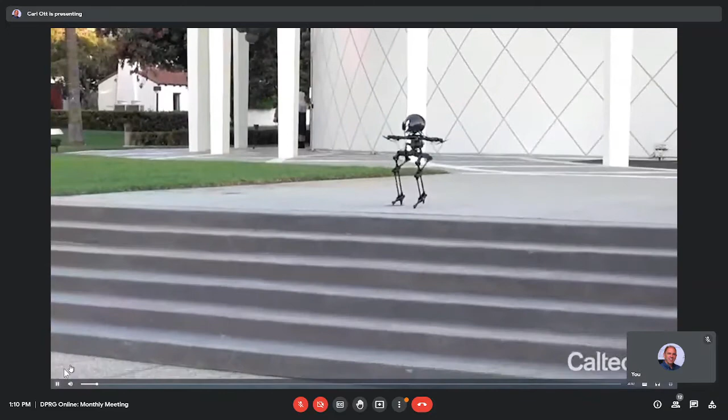So I thought, just for grins, I sent this out. I noticed it at lunch, but just for kicks, here's some kind of crazy idea, right? A walking robot that flies. So okay, let's mix up the platforms there. The sky is the limit.

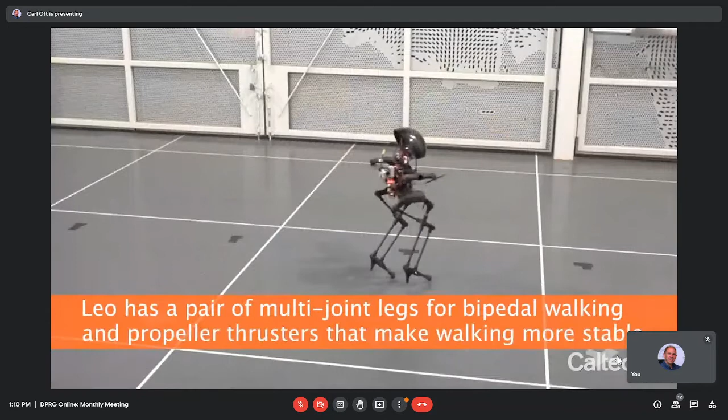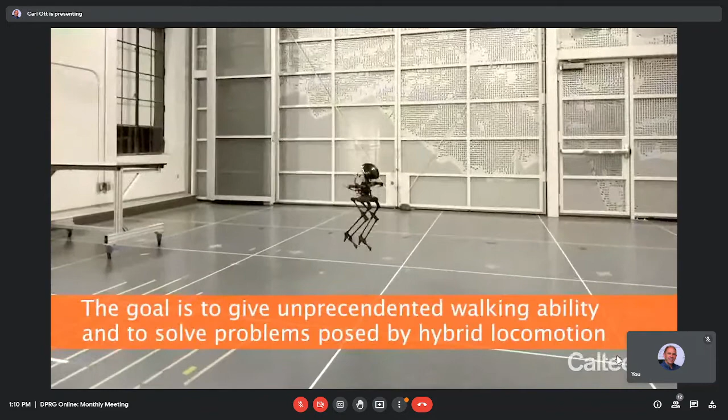Carl, I looked at that and read the article. It's more than just flies. Those rotors have to be turning for it to walk. That's how it balances. And if you look, the legs are very simple. Oh, and yeah, it also appears to have on high heel shoes. Yes, I noticed that. Obviously, a woman robot. So why would it have legs at all in that case, I'm thinking?

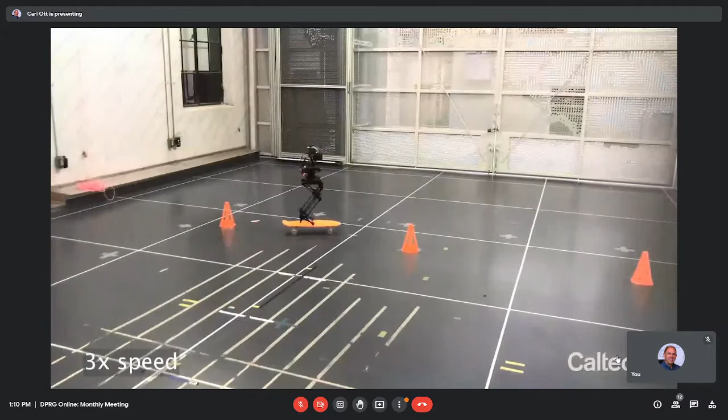Well, one might ask that question, John. There you go. I mean, other than touch, I could see it for feeling the surface maybe, but... It kind of moves like a marionette, doesn't it? Did it have it on the tightrope? It can walk a tightrope.

Yeah, but one thought would be, I wonder if it looked like it was very lightweight made, though, and they're maybe trying to conserve power, and maybe by walking they can lower the power requirement because they don't have to lift the weight.

Right. Might also help with positioning, but then again, with video cameras, I noticed like my little Mavic drone does a very good job of holding position. That's sort of an interesting thing. If you could sort of use drone technology, but yet kind of restrict your motion, sort of interesting.

Well, they're not having to balance with the legs. That's the trick. Legs just push this flying thing along the ground, but the balance all comes from the propellers. So with a walking robot, the hard part is balance, and responding to being pushed and stuff like that. Well, here the four propellers are handling all that, not the legs.

And I would think you could—I'll have to play with my drone to see what would happen if I dangle some legs from it. Although I think it tends to have a land sequence, and it also gets upset about things. At least with using a stock DJI drone, I guess it might be difficult. There's a mode you can fly in that turns off the landing sensors and so forth.

Okay, well, this is actually two-step. Sure. What I've wanted to do for a long time, let's see, with this balancing robot, one thing it cannot do is get up by itself. And I've thought for years about different ways of doing that. And what I've actually settled on—if you guys can remember, I know you haven't seen this guy run in a long time—these are bumpers, those made from rubber hose.

And here's another one that protects it because it does fall over. And so the idea was, let me back up. Suppose that I had a bail, basically replace this handle here with something that went like that. And better yet, right here, and it would serve as a handle. And right here in the middle of it, it would have a little wheel.

And then that needs to be run by something like some sort of high torque drive, maybe a worm gear or something like that, and can pivot either way. And you only have to get the robot up to about 30 degrees before it can jerk up on its own. So also then, because I could do that, I might be able to do other things with it.

Like, for example, I could lean it back and just rock back onto that tail wheel in a position of rest. Or if I thought I was going to fall over, which you can sense because once you hit full speed, you can't—you see how to describe this.

It's sort of like if you're running downhill when you're a kid and you start building up speed, and after a while you find you can't slow down. Because what you have to do to slow down is move the center of gravity behind your legs, and the only way to do that is to move your legs forward. Once you're running full speed, you can't move your legs forward anymore. So as a child, you start slamming your feet hard into the ground, trying to burn off some of that momentum so you can get your center of gravity behind your base and slow down.

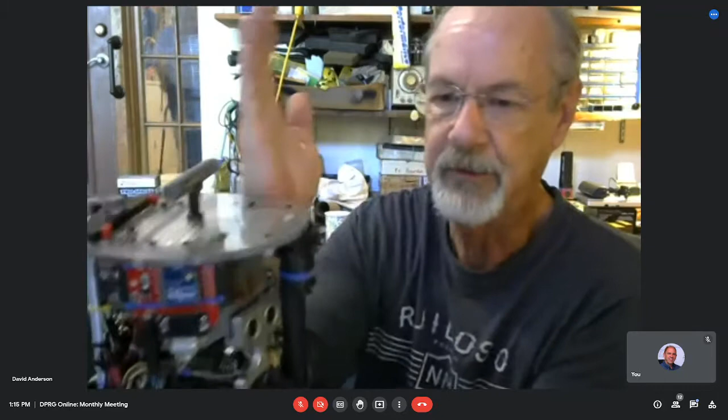So that's the same problem here. You can tell when he's going to fall over because he's leaning and running at full speed. At that point, maybe you could deploy this thing to at least catch yourself when you're falling. You might actually be able to use that in some way as part of the balance algorithm.

Yeah, so all of this started long ago when I was thinking about walking robots. The real problem when I built this robot was I spent all my time trying to get it to balance. I thought, okay, how do you get it to drive? Well, it turns out that if you make it balance, you've done everything you need to do. All you have to do is tilt it and it will drive. You can tilt it like a Segway by standing on it and shifting your body weight, or you can just shift where the up vectors are in software, and it has the same effect.

So I think it would be the same with a walking robot. That is, the gait—everybody concentrates on the gait. I bet the gait might arrive automatically if it was self-balancing.

And to prove that, I want you guys to do a search on robot passive walking. Do a Google search on robot passive walking. I'll do the same thing. Follow the articles. There should be some videos there, right?

There's one called Passive Walking Robot Propelled by Its Own Weight, from Ikinamo, 2011. Watch that video. Can't you just put it on the screen? Yeah, I got it coming. Here we go. Once we get past... oh, look at that.

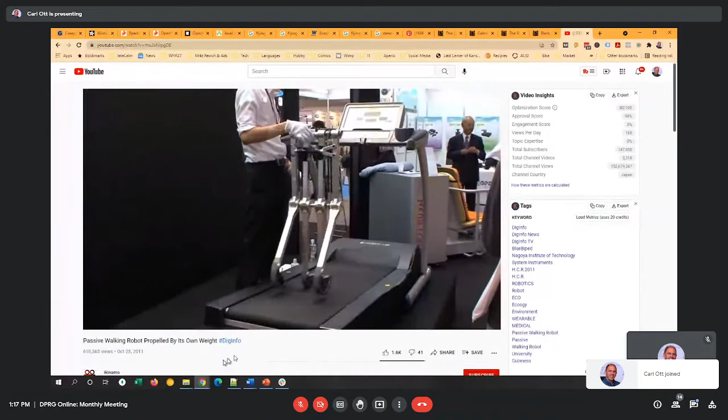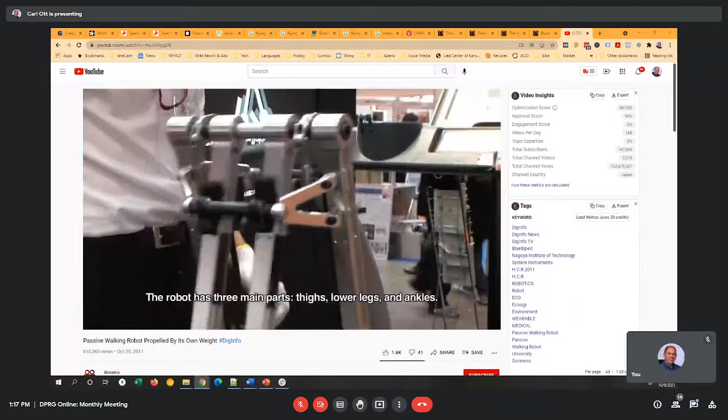Now, there's actually a guy about 20 years ago, whose name escapes me, who built the first one of these. His initial one could only walk downhill, but it walked on its own. There's no actuators, no motors, no batteries. The reason this is intriguing to me is because this is probably how we do it. One of the things that people who study bipedal walking robots observe is that all of our current robots use an enormous amount of energy to walk compared to what humans do, which is basically you just kind of fall forward, which is what this is doing.

So there's friction, which means it's taking energy for the motion, but I guess that's being provided by the conveyor belt in this case?

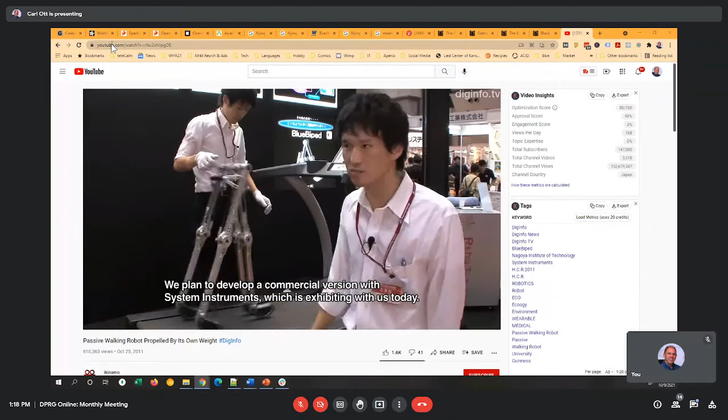There are some papers describing this pretty accurately, and the guy who built it built another one some years later, and the only sensor it had was a button for when the ball of the foot went down, and the only actuator was to push off when that foot is in the rear. And with those two functions, it could walk.

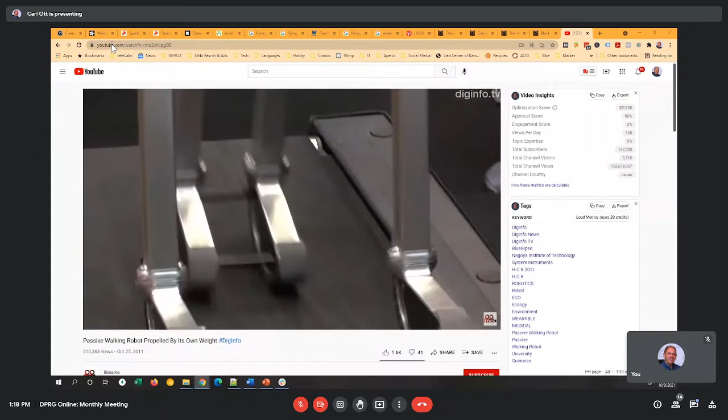Anyway, as I said, the people who study this suggest that this is actually the way we walk, and it's why we're able to do it at such low energy. You know, think about it—you eat one jelly donut, you can walk 10 miles.

It's sad, isn't it? All right, that's the end of my story. That's all I had to present.

That's pretty cool, so an upgrade, and at some point you might delve into walking robots. Well, the problem is I can't actually do the upgrade because that robot is stuffed full. There's no room for anything, I can't add any more weight to it, and it would have to be another robot. That's why I've actually never done it.

But I actually think it would be cool to have a robot whose main mode of locomotion was two-wheel, but could also drop down into a three-wheel or even four-wheel mode. Think about going off-road like a human does: as the slope gets steeper and steeper, after a while you go from two-legged to four-legged mode, leaning forward and using your arms. It seems like the robot could do the same thing on a really steep hill.

Cool. All right, all right.

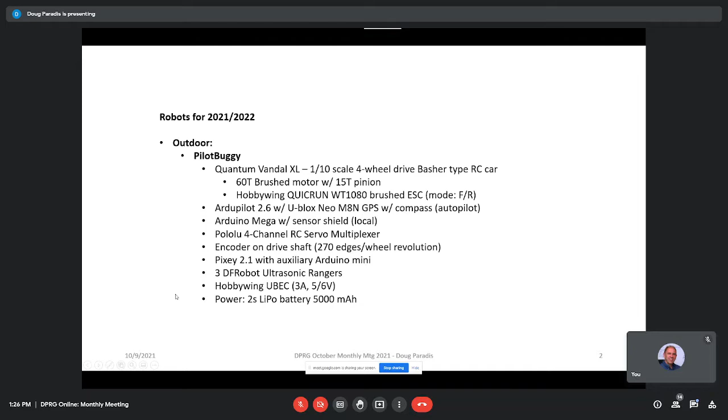This is what it looks like. So I'm going to go over here. One thing I did this year was I put on a set of NeoPixels, and this is my decoder ring, so I can tell when my safety... because when you're running behind the robot, reading a display is very hard to do, but seeing bright pixels, bright LEDs is pretty easy. The biggest problem with them is knowing which one is which, but with a little thought, you can figure out how that is.

So here's the 60 turn motor. Here's the ESC. Here's the Mega with a sensor shield on it, which breaks out so everything has a signal, ground, and VCC input for each lead. This is the NeoPixels. This is the Pixy, the bottom of it. You can't really see the camera.

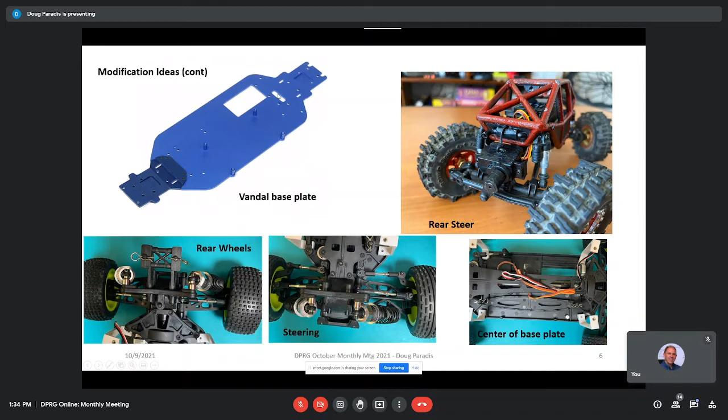So I think I've got a spare base coming to my home, and I think I can modify it so that I can basically make the back end of the robot look like the front of the robot. Now there's differences because right in this area I have my encoder, and right here is the main motor sprocket. So anyway, I'm gonna play with it.

Okay, so that's pretty much that one. And now on my indoor robot, I just call it Doug's test robot, because this is something I'm... a philosophy that I've gone to that I think has been really successful. I've got basically a standard custom laser cut chassis and 3D printed parts.

So I don't have to do that every time, I just take them and put them together. I've found a set of motors that works with this chassis that has encoders, and they're cheap, only $7.50 a piece. I'm using about the cheapest motor controller you can use. I am using an IMU, a BNO 055.

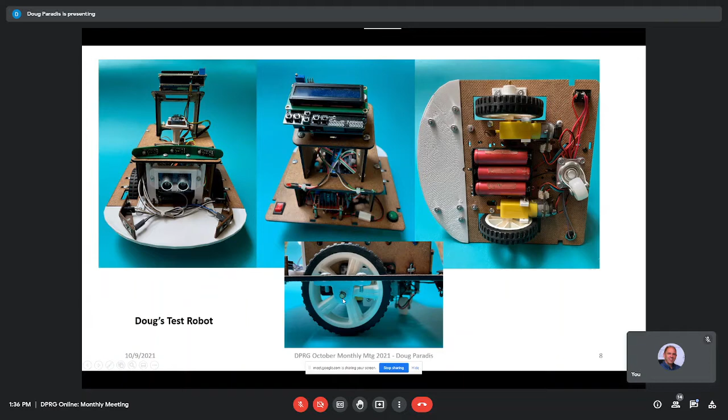All right, and it has clear forward view. This is the 2x16. This is all a package unit now. That code, I don't have to change it at all, except when I'm asking for new sensors. And in this particular one, I did try something a little different to add outboard support to the wheels. That's still an experiment.

Okay, so here's what I can do with it right now. With my software base, I can go from waypoint to waypoint using odometry. I've got simple obstacle avoidance, and I improved the code base. So what I'm trying to do here next is add mapping and path planning. That's what I want to do.

Here you can see these are my two sources that I'm working with right now. The first one's really simple, and the second one's a little more complex. I want to improve my obstacle avoidance routines and add bumpers, that's simple. And then when I get this mature, I want to move it to the Club 2016 robot. All right, I'm going to use this as my test base for the OAK-D Lite.

If I go to the 2D LiDAR, I'll probably end up with a new one, since obviously looking at that superstructure is not going to work. And I'm also doing some...

PID loop time tests, where one of the problems is when you slow the velocity of the robot down to say 3 inches per second, that's pretty slow. What you're going to run into is that you're only looking at like 6 or 7 edges per PID period. So if you were targeting 7, well the next one you'll have is 6 or you'll have 8. That's a fairly big jump. So what I'd like to do in those cases is maybe change the PID loop time, say double it, so now you have 14. Anyway, that's an experiment that's in progress.

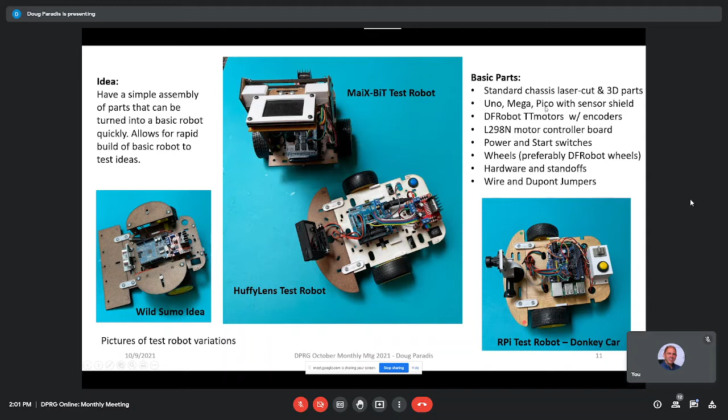The next one I probably make will likely be with a Pico. I got a Pico shield just the other day.

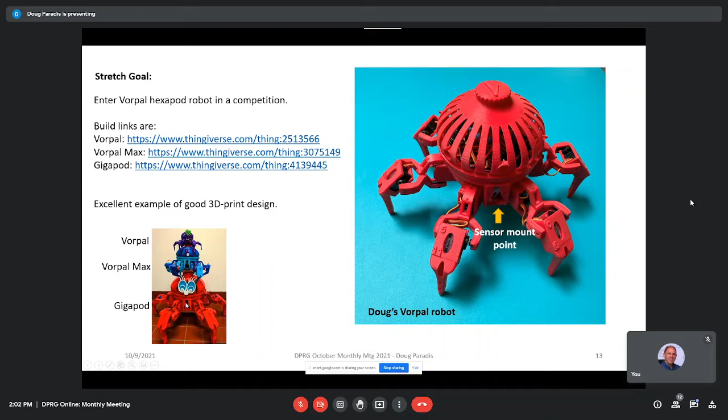So I don't know, I'm not going there, but I want to make this one work. We'll see how that goes.

Okay, new stuff. The RPLIDAR S2 is coming out, and I think it's kind of expensive for me, probably wouldn't be high on my list. One thing about it that does look really tempting - it supposedly has an 80K lux tolerance.

Texas sun usually runs - full on sun is usually 100K lux - so that could be decent. It does have a weird startup, I guess, because the motors inside have to start up, but I don't know how big a problem that would be.

Probably not. And then the OAK-D - this is the next one. If you haven't got one, they're up to 89 now. And that's it.

Now, finally, things that I don't like, and I'm not sure exactly how to get around them. One is the multiple IDEs. This is the one I'm using on most of my C code.

PyCharm is being used on most of my Python, and NetBeans is used on the Raspberry Pi when I'm using C, because you essentially develop on Windows, and then when you compile, it actually compiles on the Raspberry Pi. So that's kind of cool. Some of these other ones might do that, but this one I already have set up.

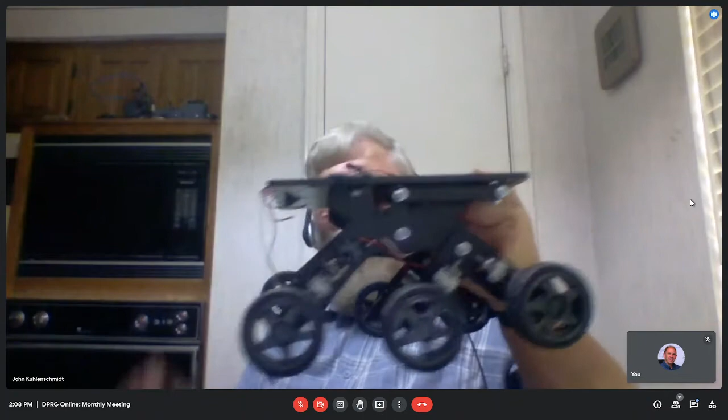Regarding indoor, I'm toying with this being the indoor robot. It has those $15 encoder reels on the front end. I really don't know how many encoders I need, because effectively I have two encoder reels and the others are not, so right now I think that's probably sufficient. I wish the encoder was in the center in some ways instead of in the front.

So I may... Well John, move them. Yes, it depends on your goals. If you want true motor control on all your wheels, you're going to have encoders on all your wheels, and you're going to have to be running six PID loops. But I'm thinking just two, and that's why I'm thinking maybe move it to the center wheel versus the outer wheel. Well, that probably makes sense.

But I don't know if there's enough room for it to fit in there between the two. As you see, there's a little room there, where here it's all nice and big because it's on the top, there is where the encoder is. Is that ABS, is that the material? This is a plastic that was, yeah, ABS, form ABS, yeah, but it was pre-cut, laser cut basically.

So this is my indoor robot. Right now I have nothing other than the motors on it. As you can see, it has a nice top to put stuff on. I'll probably build a little clog in the front, and that's why it has room underneath to put the pincher. So I'm thinking a pincher could go there, so it could even be the Syscan contest one. At least I'm toying with that for Syscan. So this is sort of the next six months project.

What processor are you looking at? I'm torn between, I like my Arduino boards, I love them, but I like Raspberry because of more memory and vision type and Python, so I may wind up going that route. It's a debate, I actually have both processors, so I lean toward the Raspberry, but it would take more time. The Arduino board I already know well, so I'll probably do the base and then jump over to Raspberry. It's my thought, and it allows for flexibility, so that's sort of the current thing.

Now future-wise, after that, the thing I would love to do, let me click on a window, okay, yes, share that. So I've always been interested in the movement of legs. I've built the Strandbeests, but what I have not done is built one where it has just four legs for balancing. So I may toy with building the cat or dog, or whatever you want to call it, version. There's several out there now, but I'm toying with building basically a four-legged version, and there's this article, for example, that's pretty good.

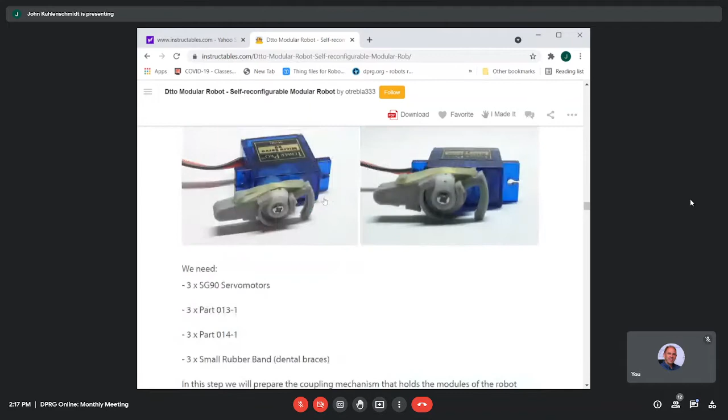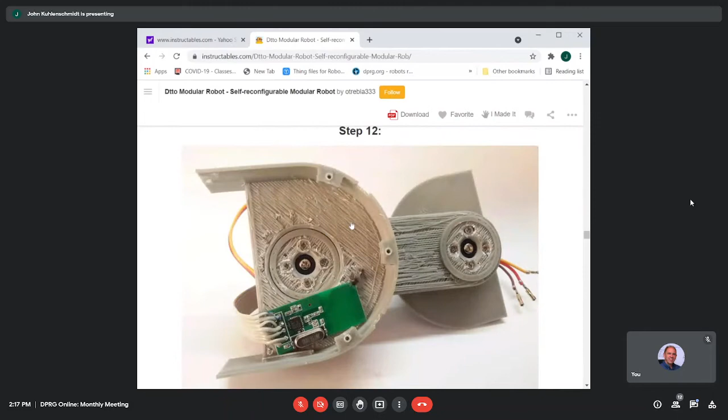I put the URL to that thing in the chat. Okay, and then there's these slinky... and there you, as I say, to me a snake movement would be interesting. So hence, they're supposed to put their camera, 35 millimeter camera lens cap in the picture so we'll know how big things are. That would be nice. But based on the fact they're using those servos - yeah, well those are the small servos, but they're still pretty big.

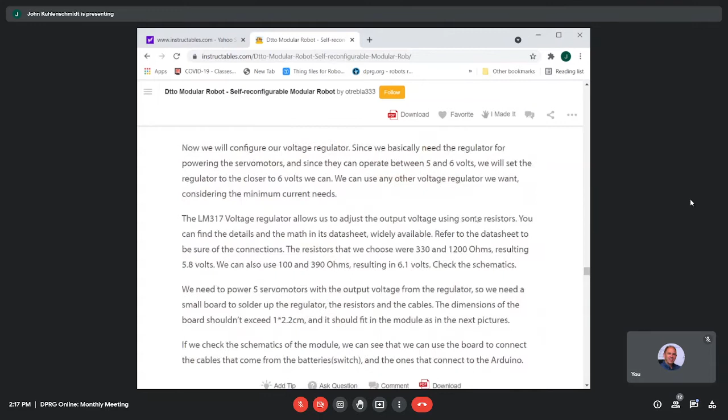At the top of the page you can see a photo. Oh, there you go, the thing. There you go, there's an example. Yeah, you can see there you've got the male DuPont clips.

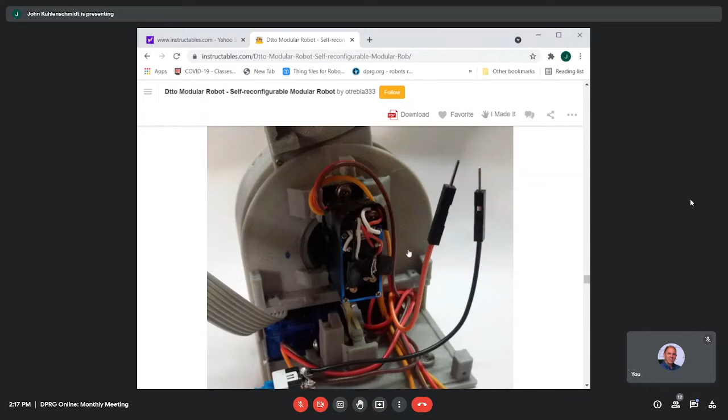Wonder where that ribbon cable goes. Well, it goes probably to the next linkage. Notice where you put one, there you go, and then it has a stretch down there below. I mean, those pins are what, 100 thousandths on that nano or whatever the board is. No, it's a nano, he went for small.

You can see how much he has trimmed in that little spot. So Ron, you're saying use the pin spacing as your ruler? Yeah, 100 thousandths on that nano. Well, how many pins does it have on a side? 20? Not quite, 15, about 20 I think they do.

But yeah, I've always been interested in the snake movement. So after I did the four, when I went from multiple legs, the Strandbeest, to a two version, which I have somewhere up here, I'm thinking the four-legged and then to the snake sort of design will be the future one.

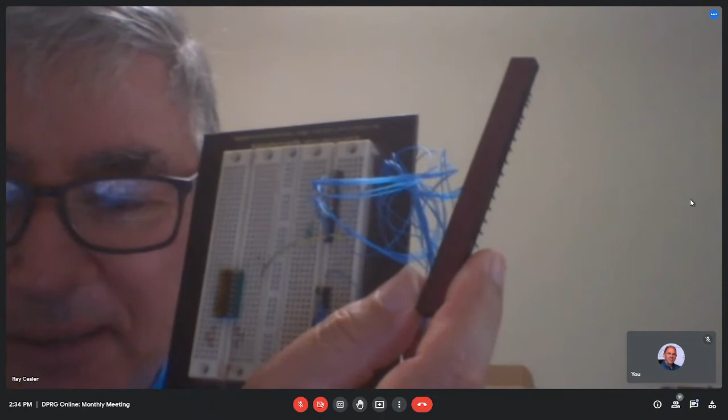So the question of the day is: what was the predecessor to that prop? Think about it — what was the thing you'd see in all science fiction movies?

What's that famous talk the guys at General Motors gave in the 50s? The turbo encabulator was clearly the predecessor. Oh, I was thinking the Jacob's ladder was the thing. Oh, you're right, and the oscilloscope with the sine wave. Jacob's ladder is more Frankenstein. I'd love to have a Jacob's ladder or a spark gap in the robot. That would just be over the top.

But this is the one I think you were mentioning. Yeah, that's it, right there. If you listen to what William Shatner says, he asks, 'What is it? It's just red lights that move back and forth.' That clip is pretty funny too. Then they get over to the other panel and he says, 'What are these lights? They just seem to be blinking in random patterns.' And he says, 'Well, get on synchronizing them so they blink together.' There's even a science fiction cartoon with a drawing of that device in the background. Yeah, it's pretty good.

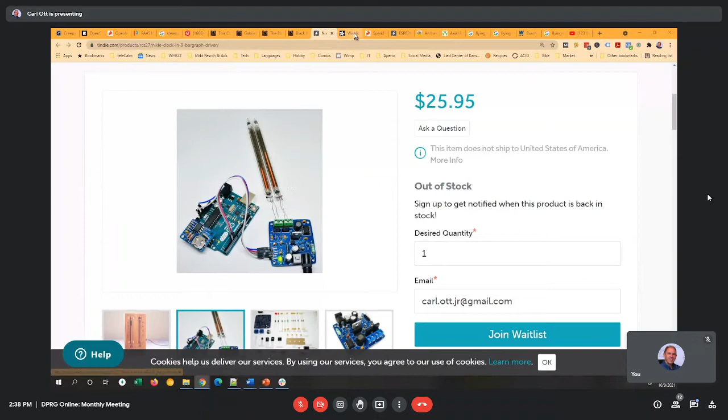Another thing, this was with the winnings from Robo Columbus - thank you, club - so I got a handful of different sample materials for EL: a big sheet of flat blue, a tape strip of green, a tape strip of red. My thinking is that these have such a saturated color and a certain glow about them. You can imagine if you have a texture like a grid, like if you 3D print a plate with apertures, you can put this stuff behind there and get a really interesting look.

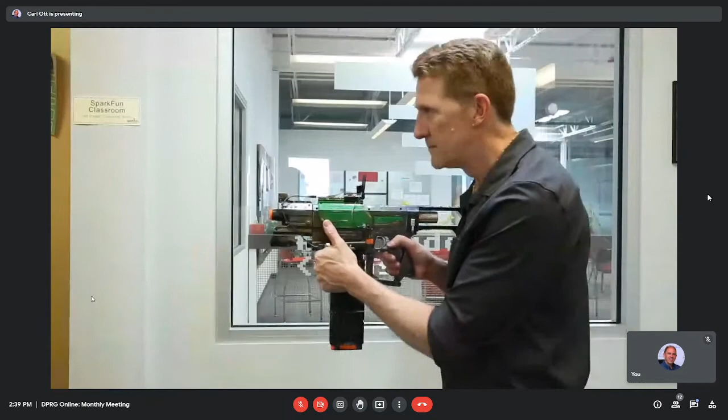Another thing I went and got is one of these translucent displays. They took one of these displays and it's got a decent resolution, and you can project different images on it. I got one of those to play around with. Actually, I saw a kit where somebody took 8 or 9 of these things and stacked them side by each, so he has like a 3-dimensional display because you can see through them all. It's an interesting idea.

And then, long ago, I also got one of these - e-paper. They don't change very fast, but they have such a high contrast. So all of these things have a certain look about them.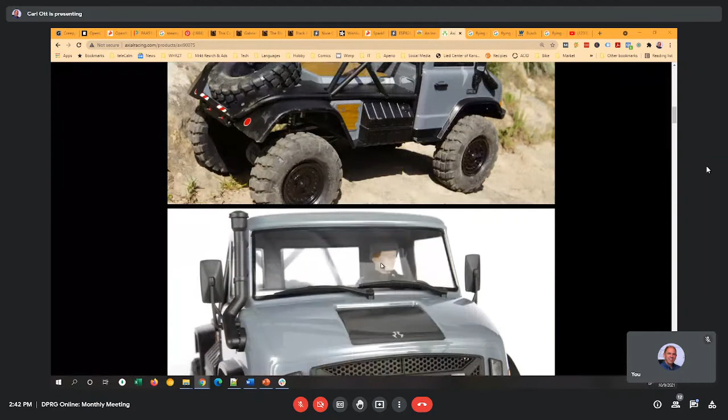So I actually have one of these kits now. It's still in the box because I'm still in buying mode, but it's a rock crawler, and I like this one because of its kind of 40s era look, I guess. But for another reason, it's because it has this big space in the back. So the idea is to get rid of the tire and maybe even this roll cage, which I think is mostly for looks. Then I would have a kind of stack decorated in steampunk fashion or alien artifact fashion, and it would have maybe the OAK-D Lite on it. Maybe some other sensors, but this would be my target for the next outdoor thing I work on.

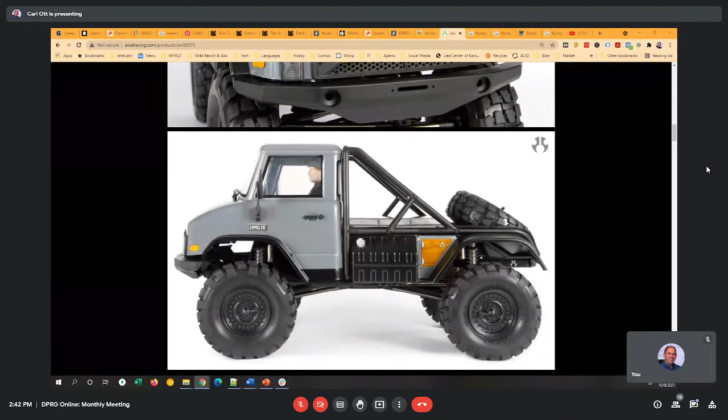Carl asked, does that have rear wheel steering? I couldn't quite tell. It does not have rear wheel steering, but I got the adapter so that it actually has a 2-speed gear mechanism.

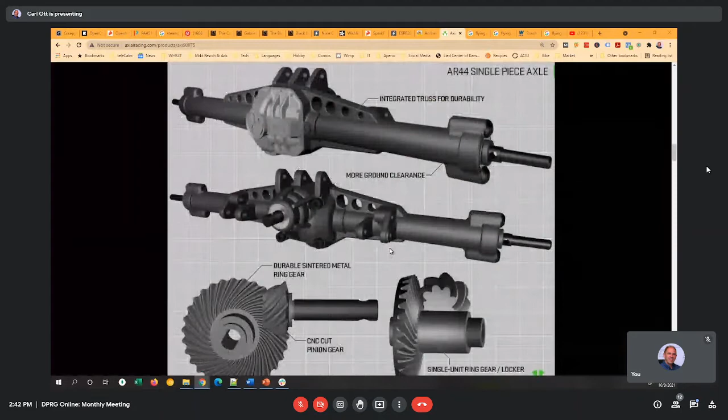So you can throw a servo and it'll go from high torque to high speed - really high torque to really high speed. And just look at the angle of the wheels on that thing. I can't imagine trying to do this with sensors, but as a human, I think it'd be fun to play with. So however I do it, I want to do it so that it's easy to move it from self-driving to...

So it's 4-wheel drive, it seems to be really well made. How much was it? I guess I could look it up - well, this one's not, I got one of the last ones available for about $300 for the kit, but I think that's basically just the mechanics. I think I still need to add all the running hardware, the motor and the radio and servos, battery. So it's going to get pricey, but I'm hoping this will be something I can play with for a while. And it's a popular enough chassis that there's all kinds of third-party body parts for it.

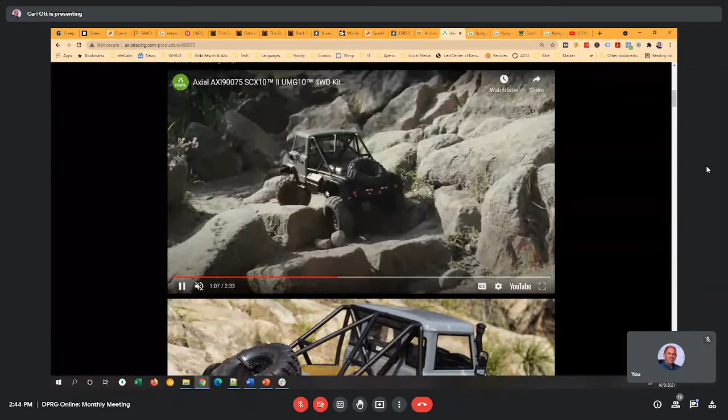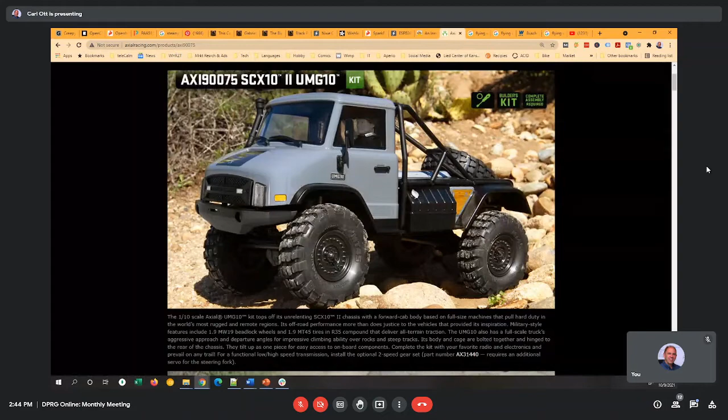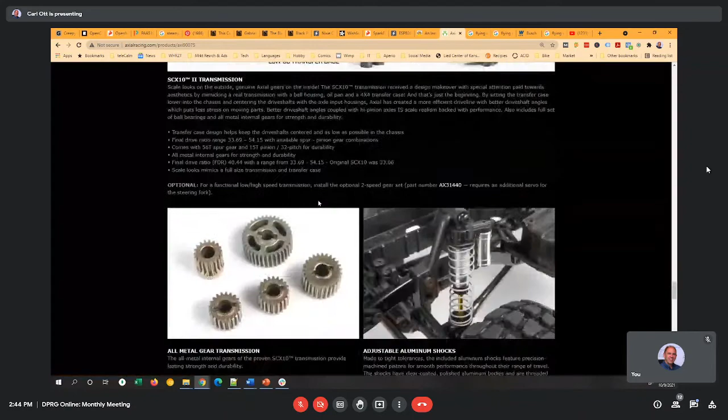Like somebody will let you replace these with working turn signals. Carl asked, is there a picture of it without the body on the chassis? There are, but it's... where is it... it's the SCX10, SCX10-2.

That's another thing, is that this chassis is used in a lot of the Axial models. So another reason I like this is because I suspect it'll have a long support life cycle. It's recently been replaced by the SCX10-3, but this was in play for so many years that I think it should be easy to buy parts for a long time.

And even when I got the 2-speed gearbox for it, I'm tempted to go get a metal set of gears. You can replace the main drive gear, which is plastic, and put a metal gear in there that somebody else made.

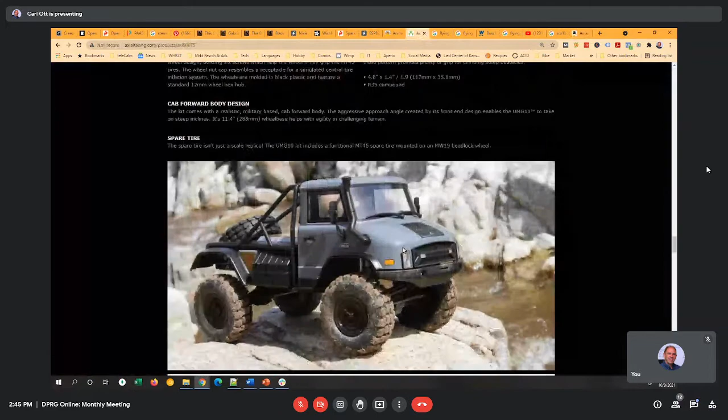Yeah, after World War II, that was the ultimate changeable vehicle. You could get plows and potato harvesters, and put just about anything on it. It's 4-wheel drive, so I guess it's probably like the Humvee of that era. A Humvee might have a wider wheelbase, but I didn't see any Humvees I liked. I just like the look of this one, and I think the combination of this 40s era style plus a steampunk alien artifact kind of thing would be a nice combination.

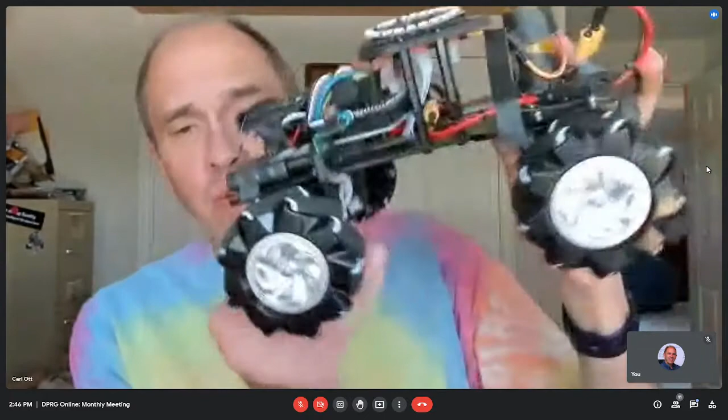So what I'm thinking for the next indoor version is to make one that has better suspension - not that it can tolerate drops, but that it's not so sensitive to pressure and alignment, so I can deal with uneven floors better. This was the development version, so for the next version it'll have suspension. Maybe it'll have that OpenMV cam facing down, so we could do line following and optical flow.

But more importantly, since it's a Mecanum wheel robot and I'm after aesthetics, with all these funky lighting ideas, I'm seriously thinking it needs to have a body that's a flying saucer. I'd make it a little bit thicker so you'd have to get down low to actually see the wheels. But I'd give it some tail fins, and it could have lights for whatever. So that's what I'm aiming for on the appearance of the next indoor one - either steampunk or 50s sci-fi.

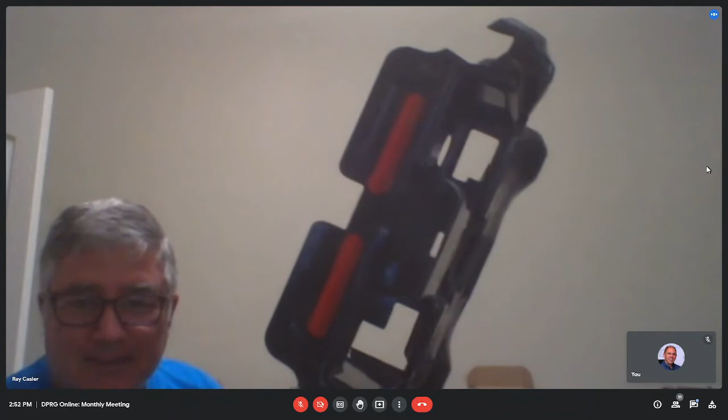Hey, there you go. What's that? Ray's always got the big stuff. Carl, this is the cover to one of the wheelchairs that I got, and you wouldn't think, it's got little red reflectors on the back here for driving down the road. It covers up all the nasty looking wires and batteries and everything. And this is the post for the seat to come up through here. It makes it look so much better when this thing is sitting on it. It looks pretty cool.

It's funny, it doesn't take much, right? So aesthetics, it's everything. Cool. Hey, speaking of Carl's flying saucer, have you guys seen the little drone toys? In fact, I can present and show you that, just sort of a segue from Carl's flying saucer.

Okay, here we go. Let's see if I can figure this out. Are you seeing my thing here? Not quite yet. Okay. Let's see, is it presenting? Not yet, okay, wait a minute. I asked to present, let's see. Let me switch back, let's see. Carl, are you talking about all these under $100 drones that have appeared here in the last year? You mean Ron? Is that what I said? You say Carl, Carl, Ron. Ron. Wait a minute, let's see. Are you seeing? Wait a minute. Okay, oh hang on, let's see what. I have to select the window. Hang on, let's try screen 2. Okay, well first I'll show you this. Okay.

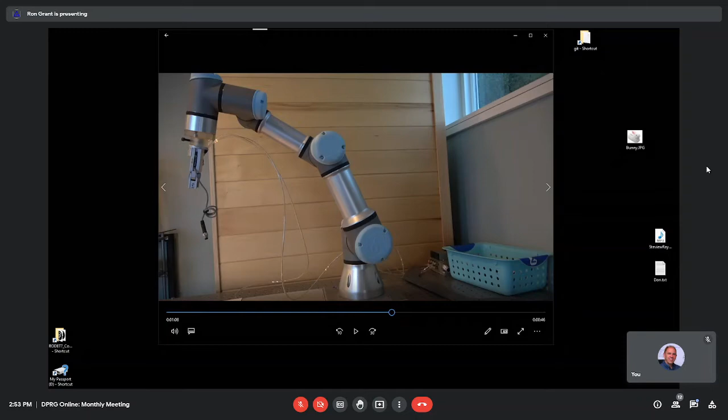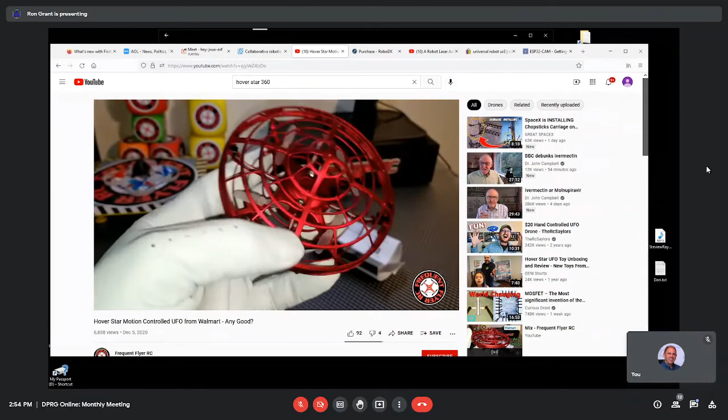There we go, okay we got a robot arm. Now let's see if I can get the Hover Star over there. One sec, okay, we seeing that? Little flying saucer, yep, okay. Unfortunately, I have one of these that my brother gave me. It's a $20 or $25 little drone, but pretty cute. It's got 4 sensors around the perimeter, one at the top, one at the bottom. Let's see if they'll demo it here. It's about 3 or 4 inches in diameter, and it is a quadcopter, but the cool thing is you pitch it in the air and it starts to fly, and it has obstacle detection.

Once they launch it, there it is, we're seeing it. You charge it up, all self-contained, it can't hurt you. Let's see if we can skip ahead a bit. Here we go, here it is flying around the room. So you just chuck it in the air and it starts to fall and recognizes it, switches on. So it's got obstacle detection with, I assume, IR sensors, close range, but pretty slick. You put your hand under it, it'll raise up.

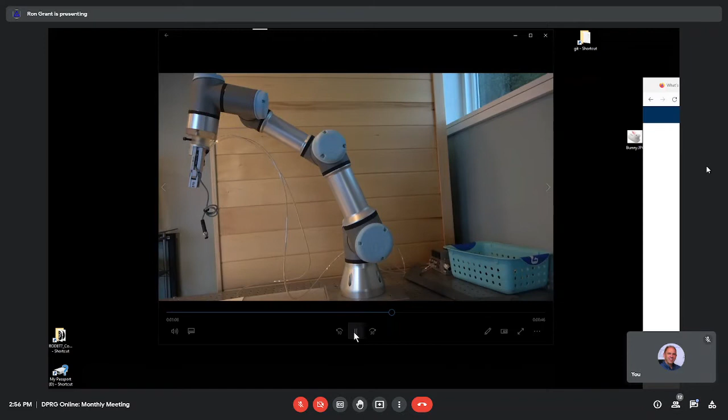Yeah, there you go. Oh, and I'll show you. Let's see, then the other kind of fun thing, although I'm curious about it, is let's see. You're seeing the robot arm, I guess. There we go. So this, my brother's got this toy, and I'd like to have one. But the frustrating thing about it is it's about the size of your arm. It's really slick. And the last day I was visiting him, I was playing with a thing called RoboDK that lets you do offline programming. I don't know if you're hearing my voice. I'll mute that, let's see.

Anyway, I didn't have much time to play with it, so the only thing I could really do with moving it around was to just manually jog it because I ran out of time. He was having difficulty interfacing it. But the sad thing is it's cute, but it's 20 grand. There ought to be a way to do this for a little bit less money. This has 6 degrees of freedom, and it is slick, but there ought to be something equivalent.

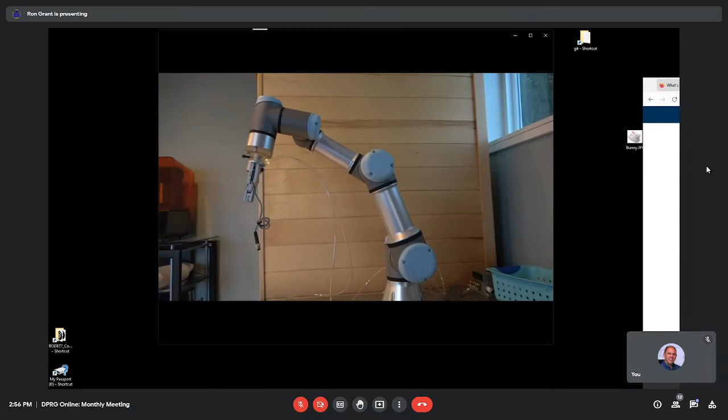And I know Will's playing with something. Let's see if I can bring that up. It's a $1,000 robot, fairly simple, but kind of neat. Let's see if I can find that. Okay, I'm not seeing it. Let's see if it's in my history here. One sec.

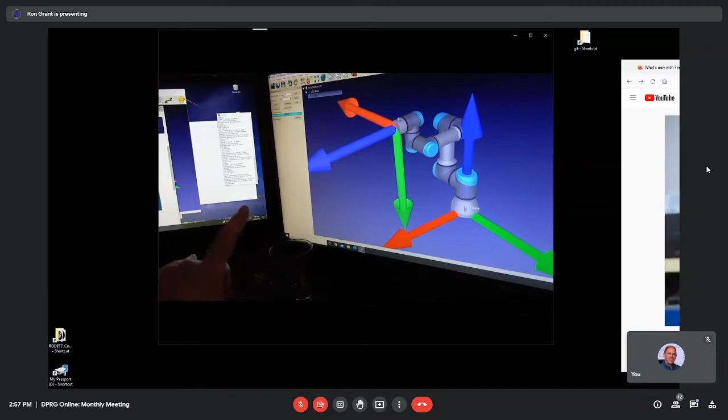But the RoboDK is interesting, and there are free versions. The problem is, if you want to do offline programming that's fine, but to do it online, real time, it's $3,500. So it's an expensive piece of software. But here's a $1,000 arm, and I thought this was pretty cute.

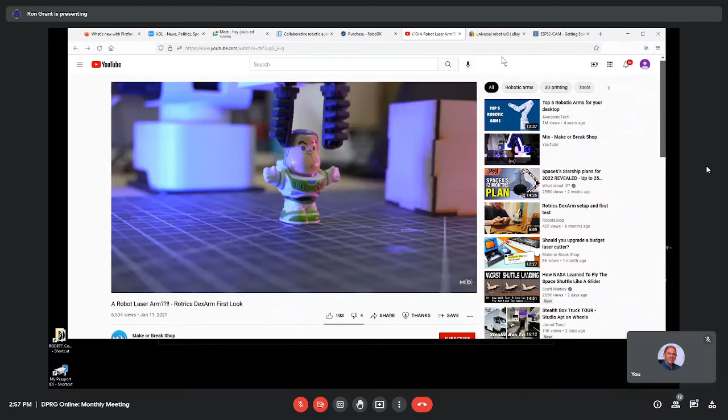Will is investigating using this in a pick and place type of operation, picking and placing little parts from a carrier into a work area that's operated on by a machine, and then taking it back out to a pallet or tray, whatever you want to call it. So anyway, I thought that was kind of interesting at about $1,000.

It'd be nice to have something more like a collaborative arm for less than 20 grand. The cool thing about that collaborative arm is it can move really fast, but it's also set up so it doesn't take your head off, which is kind of neat. So you can sort of work with it. But anyway, that's my story, I don't really have anything, just a couple of things that inspired my interest, and I will quit.

Let's see if I can get rid of this. There we go. Ron, the gentleman that gave the talk last month - no, was that here or was that out in California? At any rate...

About his company, he had a walking robot, but he'd sold a whole lot of these little motors he'd made for arms. Basically it's a coreless motor, and in the center of it he put a planetary gear reduction - those high-speed gear reductions called planetary gear. He showed us all this CNC machining he'd done, which was glorious.

This was something... in my truck I have to give it a hard whack to get them to read, they get stuck at zero. So these are clocks from a couple different Packards.

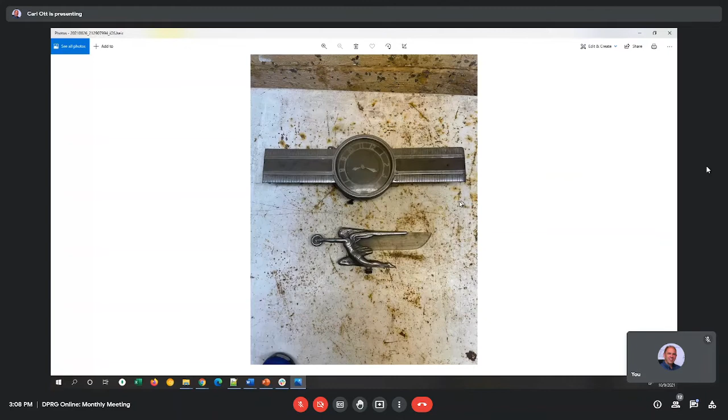Apparently this bottom one was from a 1953 Packard, and the top one was from a 1939 Packard. I'm not quite sure what my dad had in mind to do with them, but he was describing these, and this was the 39 Packard with the dashboard surrounding piece.

It must weigh like 4 or 5 pounds, but this is a radiator cap. Yeah, you don't want to meet it. Radiator cap from a Packard of some vintage.

The idea was he was explaining that these clocks have an interesting story behind them, in that he described them as pulse wound electrical clocks. In 1939, he said this may have actually been the first instance of having an electric clock in an automobile, in that Packard.

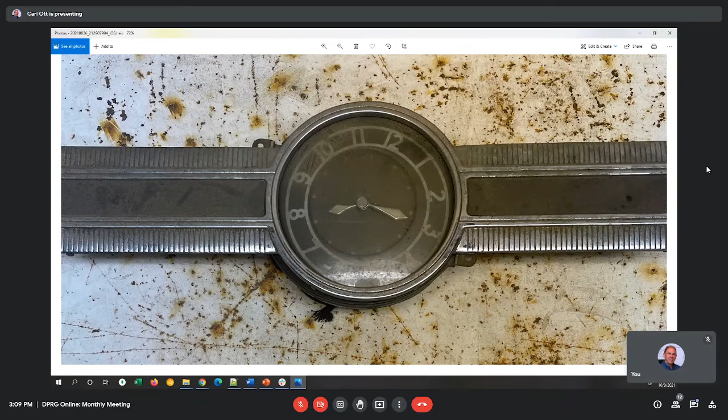He said the way it works is that behind the hands is a spring wound clock, but the spring has these contacts. When the spring is fully wound, the contact disengages. When the spring goes down and the clock is unwound far enough, it starts to draw power from the motor and winds the clock spring, then it hits the end and disconnects the motor that drives the clock spring.

That was the case not only in the 39 but even in the 53. But he said in the 39 version, people were really concerned, right? Think about it, in 1939 this is the age when you knew what happened under the hood of your car because you had to fix it all the time to keep it going.

And batteries were in no way then what they are now. So as much an innovation as it was to have an electric clock in the dashboard of your car, people were so concerned it was going to drain the battery down that they wouldn't be able to start their car, that the standard thing to do if you got one of these Packards was to snip the clock wire so it wouldn't work.

So anyhow, I don't know about this, it's a little bit too large to think about putting in a robot, and it probably has more value than I wanted anyhow, but it's interesting to me. And yeah, there's a neat aesthetic to that vintage stuff.

You know, 60 years later, in my wife's vintage '96 Mustang, I had to add a battery disconnect for sort of the same reason. Somewhere in the car, at that year there were probably at least a dozen microcontrollers, maybe not quite in '96, but something was sucking the battery, and God knows what it is. To diagnose that would be rather difficult.

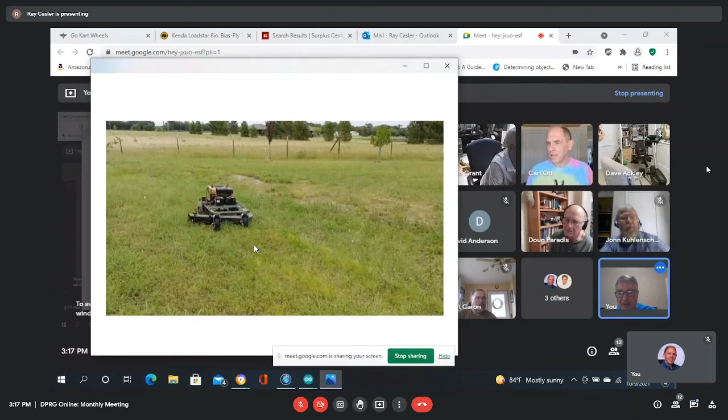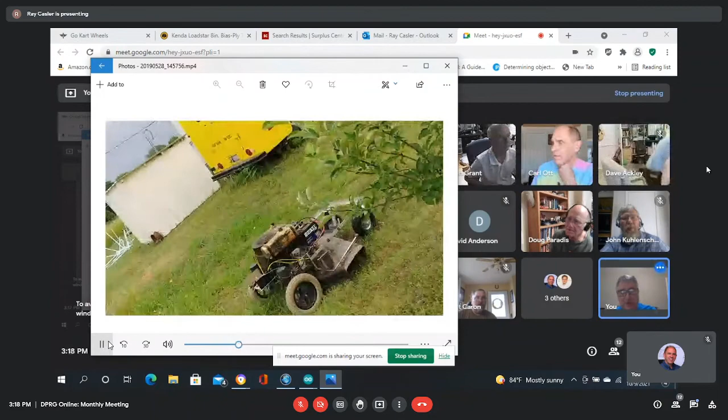This is using 2 wheelchair motors, just in RC mode, radio controlled mode. On all the platforms now, I've gotten rid of whatever processor was on them, either Megas or Uno equivalents or something like that. I've gone to the ESP32, so now anything radio controlled is LoRa. And all the platforms had RoboClaw controllers on them, either different sizes, like the 2x60 or the 2x30, and it actually worked pretty good. I also had a first-person view camera on it, so I could see where the thing was going, basically sit within range of that camera, control it, and see where it was going.

The other one got out of the photos - didn't mean to do that.

Let's see, photos. I think this one's actually on top. And this was the other one, basically parts off of a riding mower with a 42-inch deck and a 10-horse gas engine. I also wanted to try to do the same thing with a push mower, and I had a couple different versions. This is my RC LoRa controlled box now. I was using a plain remote control before, but now this is what I use.

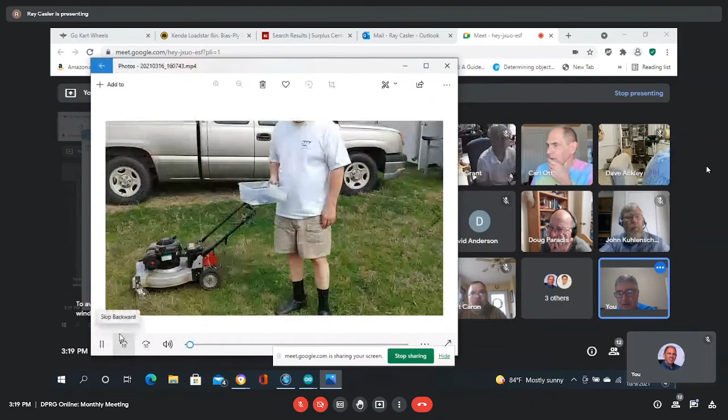So for outdoor contests, are you allowed to mow while you're executing the contest? No one said I couldn't. That seems only fair. Wherever I'm at, I don't know if the person would appreciate that.

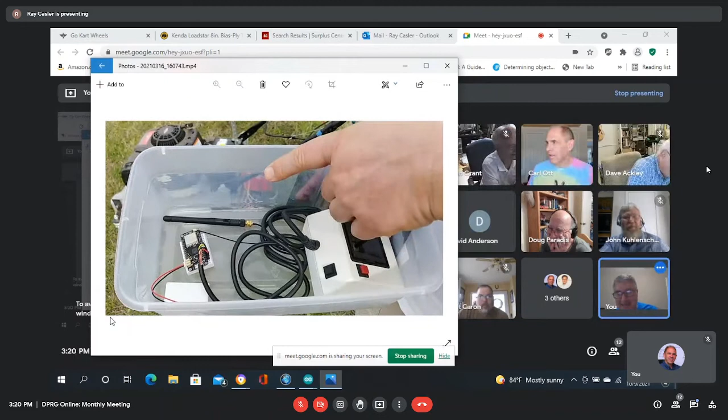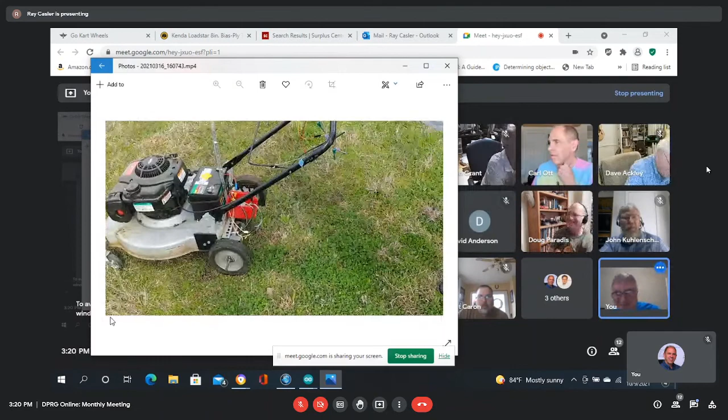I like your container, it looks like it could also hold your lunch. Yeah, it's lunchbox, spare parts, anything. And that's what's kind of nice about those, you can hook up a battery to it. It can actually charge the battery from the USB.

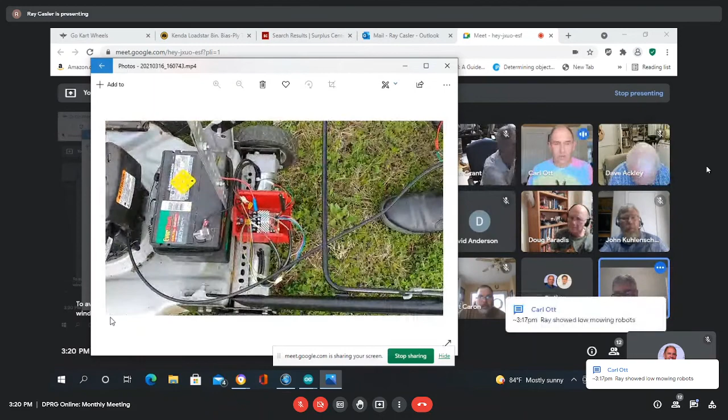Ray, you have plans to do some things with this moving forward now? Well, what I wanted to do—these were all differential drive, and I've got a riding mower that was Ackerman steering. But the Ackerman steering, it's difficult to follow GPS coordinates with that because you can't pivot on a wheel or turn in place. It's just more difficult to do. I actually wanted to make a 4-wheel drive version of it.

Oh yeah, and this was my fail. I found out that my tires were actually spinning on those gray plastic wheels, and the thing was barely moving. There's also a flap underneath where the corners were folded, supposed to push backwards and prevent grass clippings from coming at you. It was actually sticking on our coarse grass here.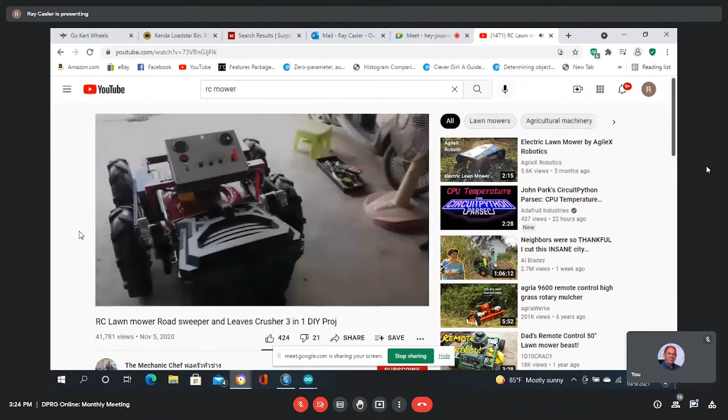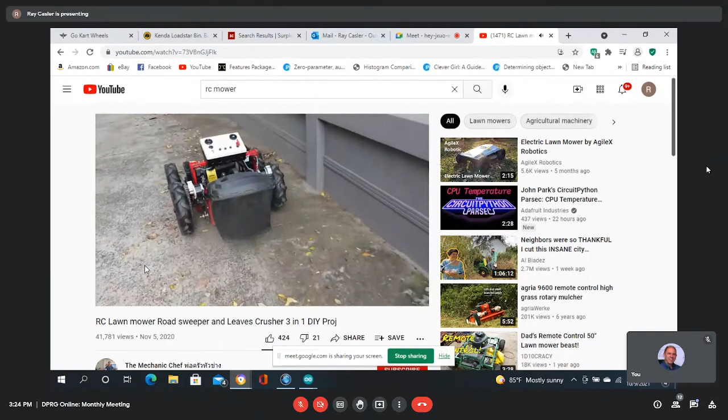And now I'm not going to find it. Oh, here it is. The wheels that I have on the riding mower are really too wide, and I think this guy—I'm not certain where he's from—made a separate platform where you can attach different things to it. He's just using bicycle motors here, I think they're 350 watt, and it looks like the thing will go through anything. Since that's what some areas of my property look like, that's what I need.

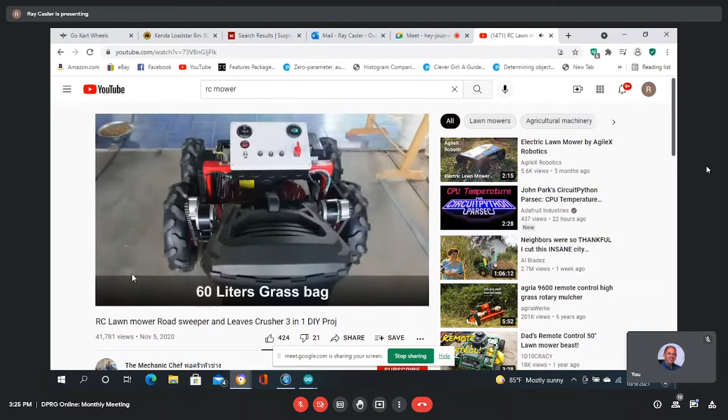Very happy soundtrack to that video. Yep.

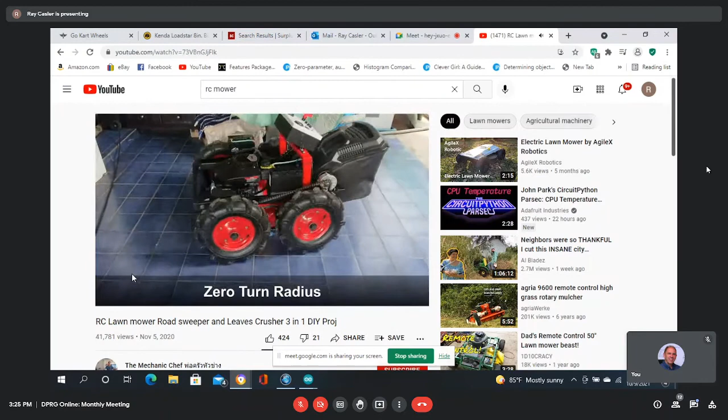Hey Ray, does he show a build video on this? It might come here in a second. But is it remote? Oh, it is remote controlled, not automatic. He does in another one.

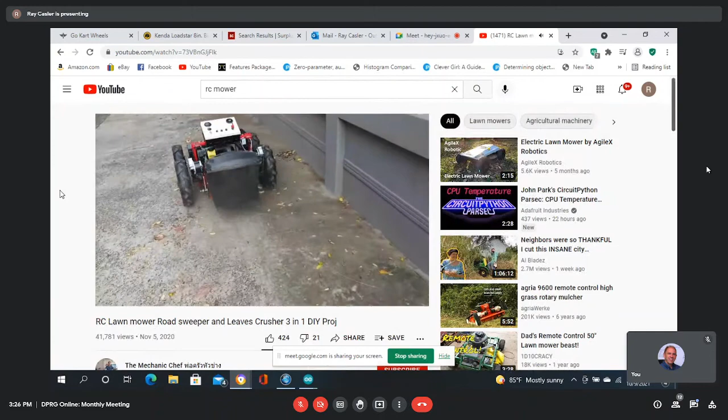I like the comment he has down there. For those asking for plans, it's not rocket science. Did you see that? Right? No, slide down to the comments, keep sliding down a little bit. I'm sorry Doug, I couldn't hear you, what'd you say? I said if you slide down through the comments, he's got a comment. He says, those asking for plans, it's not rocket science. Build your own, I guess. Huh? Yeah, but I was curious about how he handled it—very neat idea.

How he handled the chain drives. It looks like he just has the same size sprocket on each wheel, and he's got an idler underneath between the two wheels. That goes to these two. I found out the only English text I could read was that it was a 350 watt bicycle motor on either side, 24 volt.

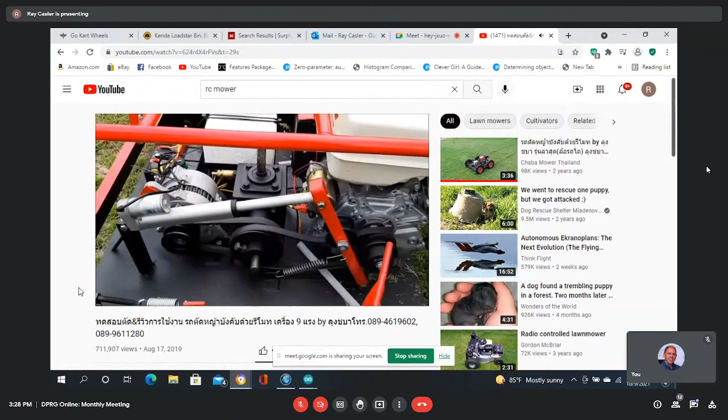At the very beginning of the video it showed the frame, the outer frame attaching the inner. Are there any more views of just the outer frame by itself? There's another video here I had played before, not sure if it's in this one. This one may show more. This is an older version, so it's not the same. Can't understand the word he's saying, but I'd like to see just the frame itself too. There's a mix, but there's several videos there.

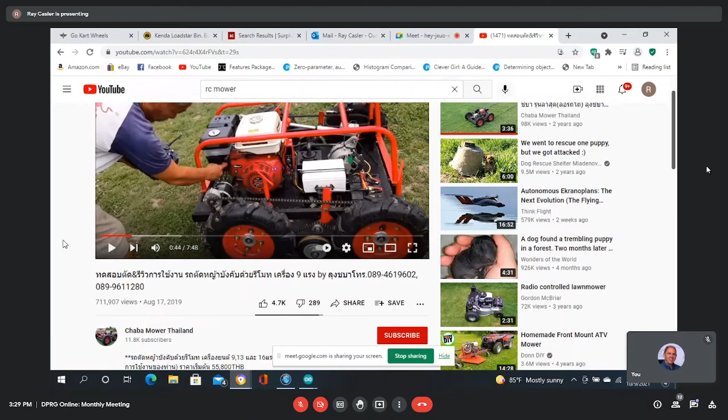Anyway, that's the kind of thing I wanted to do. I've got much smaller wheels than this that I actually welded. I found basically a sprocket that would fit inside the hub, drilled holes in the hub, and welded the sprocket to it. So I pretty much have the wheels down, and I just make a rectangular frame, with two sets of chains coming from each wheel to a wheelchair motor placed about in the center, as opposed to one chain like this. But yeah, I thought that was a neat concept, and that's what I'd like to do.

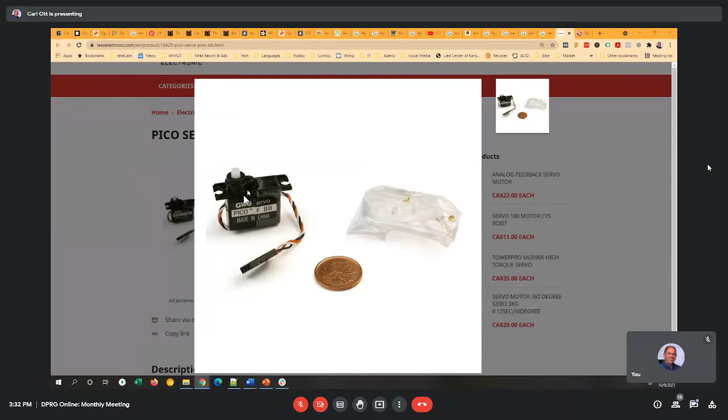At the other end of the size spectrum, there are these tiny little servos. Look at this thing, it weighs like 6 grams. And Pat, that's for you, it's a Canadian penny, so it must be a Canadian servo I guess. And then there's also this one, it weighs 2 grams. Teeny, and it's linear, so when you move it, it slides back and forth. Yeah, linear throw. I've got a couple of those somewhere. Pretty cool.

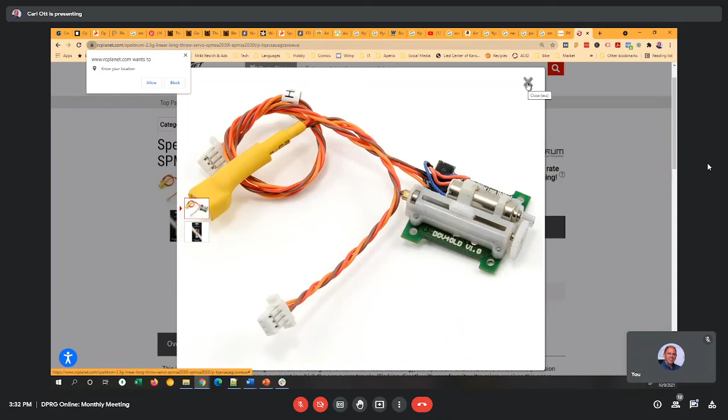I can't imagine they're going to have much torque or force, but for moving things with a physical change on appearance, aesthetics, I think. Anyhow, they intrigue me, I don't know what to do with them just yet. Hey Carl, maybe more torque than you think, because depending on the pitch, it's like a lead screw. Slide down, well, 100 grams, that's pretty good, 3.5 ounces. I don't know what the other one was either, but it's 12 inch-ounces, so I guess that's pretty good too, isn't it? It's even ball bearing.

So I don't know what to do with them, but in terms of fun parts, you know. Yep.

Yeah, I bought a linear actuator from Tanner's. It was like $10. Didn't really know how much force it could produce, and tried it on the riding lawnmower to steer the wheels. Just sitting on a smooth concrete floor, it didn't have enough force to turn them, so I had to get one that I knew what it was. It was actually 55 pounds of force to be able to turn the wheels when it was just sitting there.